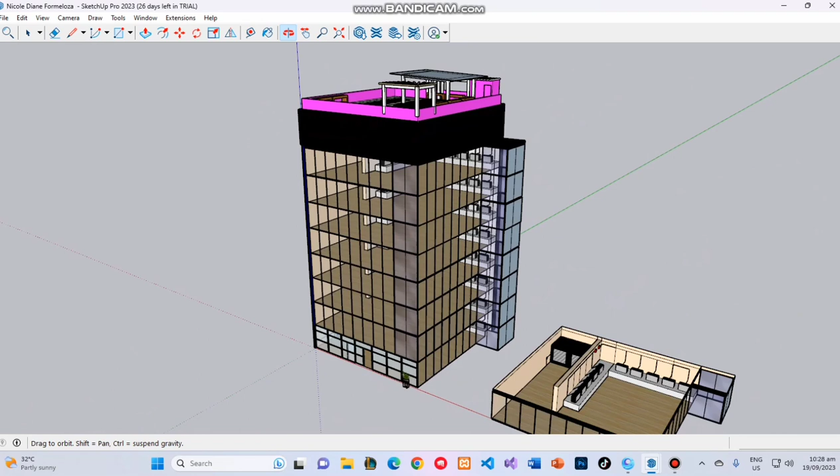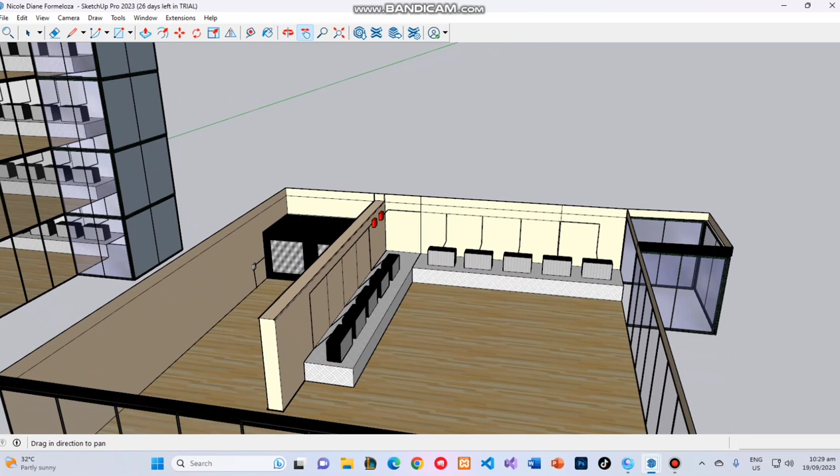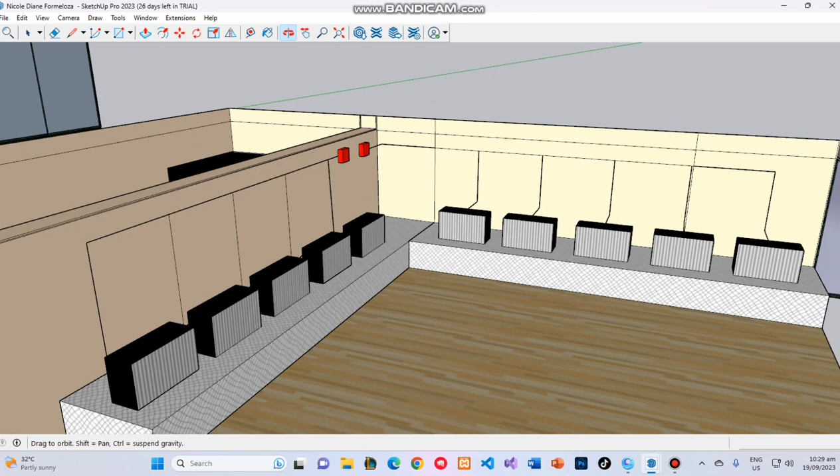First is the work area, which are these computers. Next is the telecommunications cabinet. So to connect the work area to the telecommunications cabinet, I put two switches, these two red ones. And these wires here are called horizontal cabling.

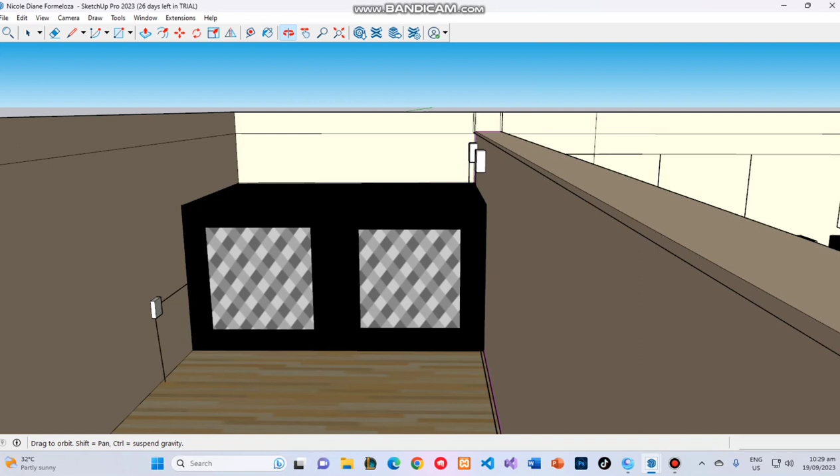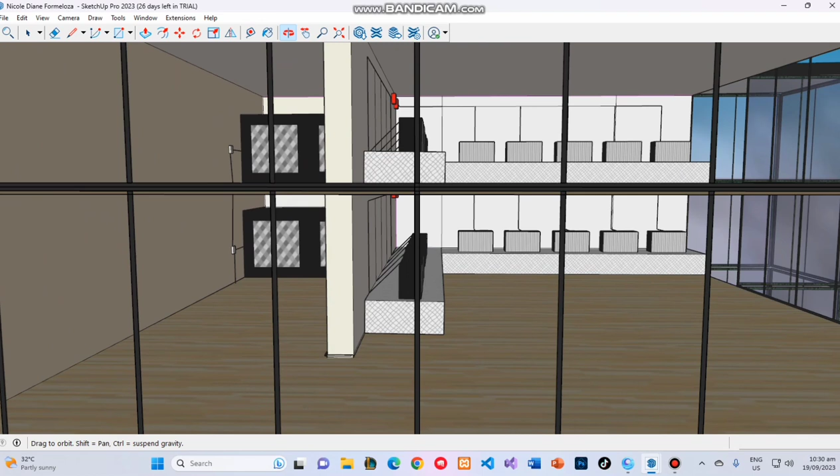Next, we can see here why there's a wire going down, or backbone cabling. It is because this backbone cabling goes all the way down, from the 8th floor to the first floor, and it's connected here to the equipment room or entrance facility.

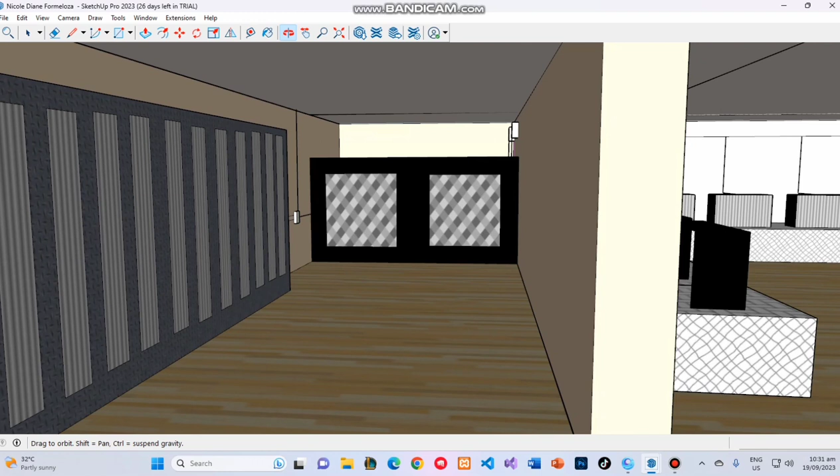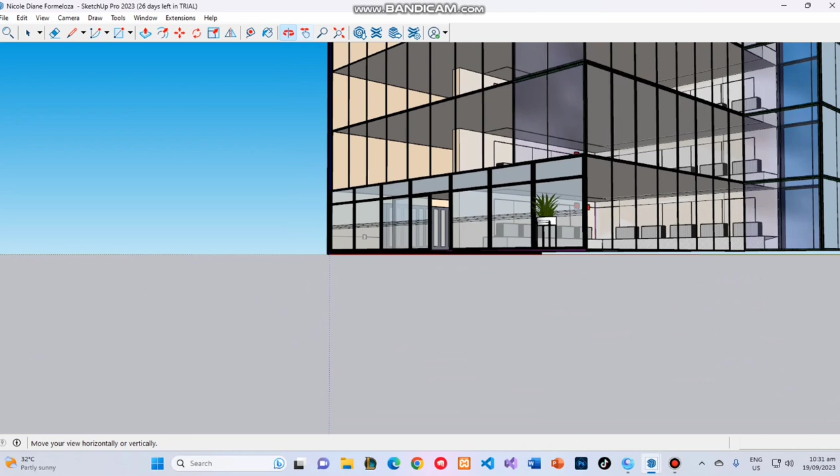And then this wire here is for the entrance of the building. So this first floor is the equipment room, and the rest of the floors are like this. This is the whole thing.